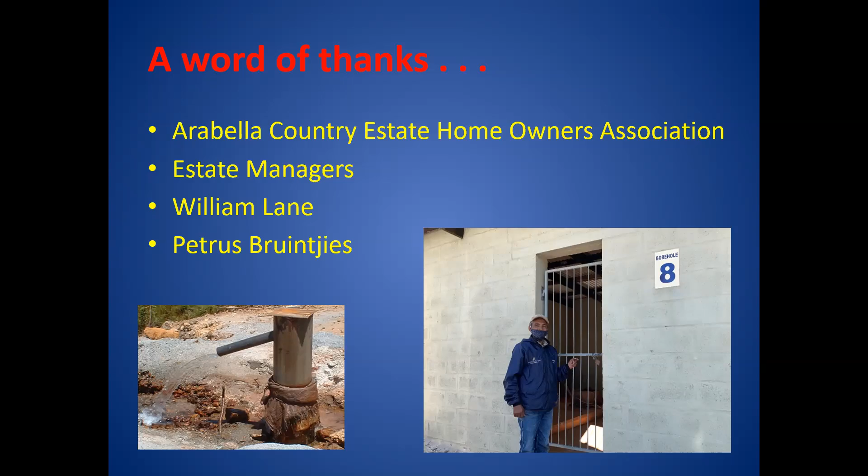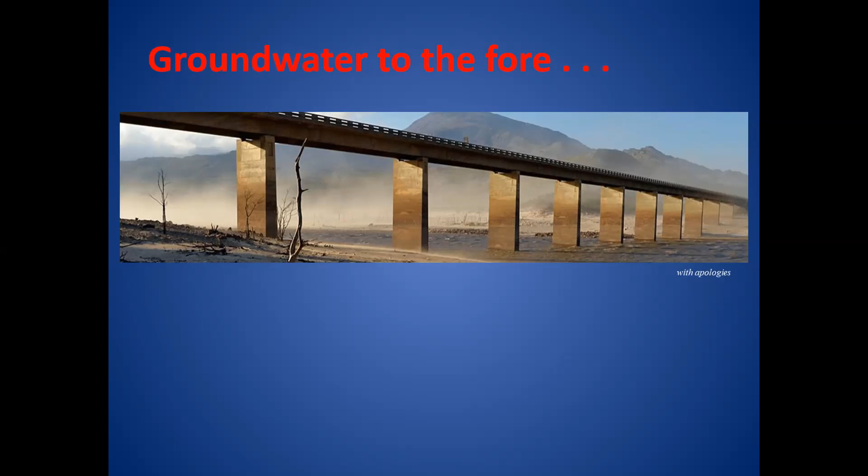This is a picture that many of you will be familiar with, but it's slowly starting to recede in our minds that not that long ago, Theewaterskloof Dam was operating at around 13%. Cape Town was about to go into a day zero scenario. So groundwater came to the fore, and it was on everyone's lips. We were starting to think about how the population of Cape Town was going to be supplied with water.

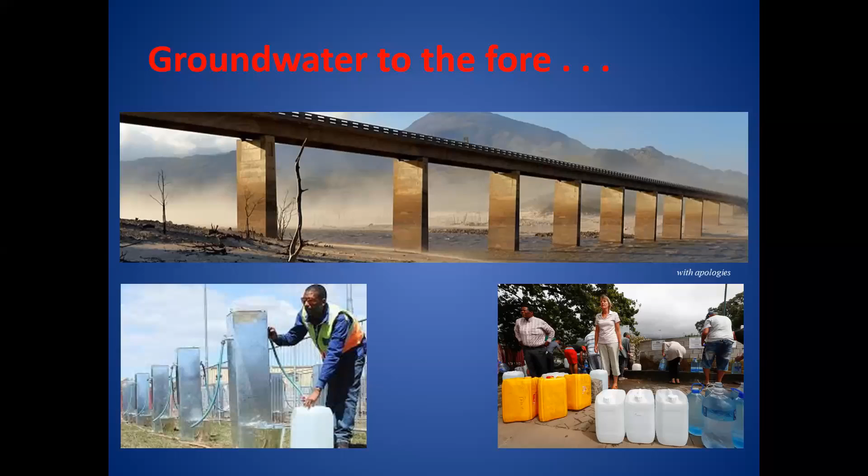And the city was talking about pods, and we had to go and fetch water in buckets and barrels and containers. And so groundwater is very much at the forefront. During that time, though, there was a lot of negative comment about groundwater, how it's an unsustainable resource and it's badly managed and so on. And I hope what I can do today is demonstrate to you that that's not true.

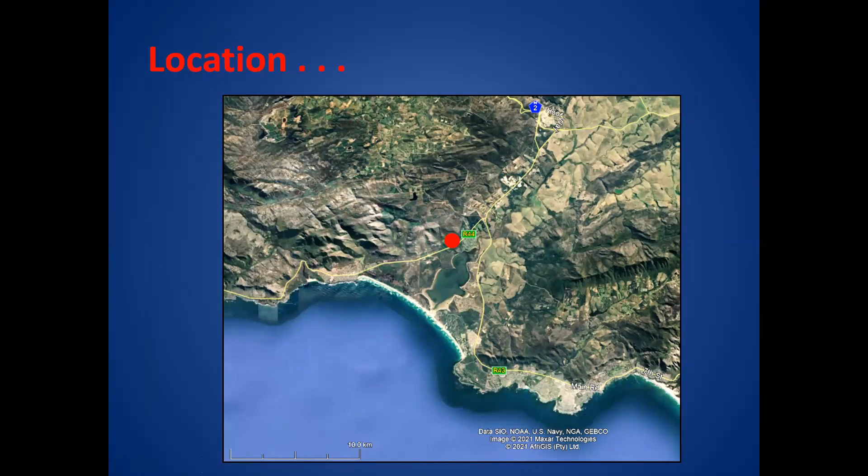So to give us a location, Arabella Country Estate is located at the end of the R44 to the east of Kleinmond, which is situated here, and to the west of Hermanus. It's located in this valley, the Bot River Valley, and this is the Bot River Lagoon that many of us drive past all the time.

It wasn't a smooth process. There were a couple of developers that were involved, and every so often the people we were dealing with would change, or the name of the development would change. I think it started out as Laughing Waters, then it moved on to Hermanus River Country Estate, I think, and it's been quite stable at Arabella Country Estate for the last while. And Arabella Country Estate contains three different components. One, it's the hotel. Two, it's the golf course, and three, it's the residents that have houses in the estate. But they operate and are supplied with water from the same source.

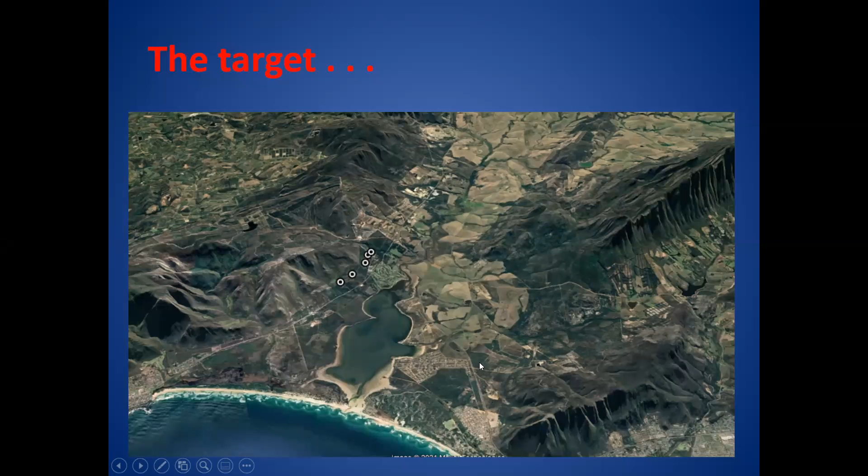So over that image, I draped the 1 to 250,000 geological map. And the key feature that we see is this major fault that runs here, and that is the western limb. And we see another major fault system that runs over here on the eastern side. So outside of the valley, we have Table Mountain Group, and on the inside of the valley, we have Bokkeveld. And the agricultural practice is all on the softer, more erodible and soil-rich Bokkeveld, where the water is stored in the harder, very competent quartzites of the Table Mountain Group.

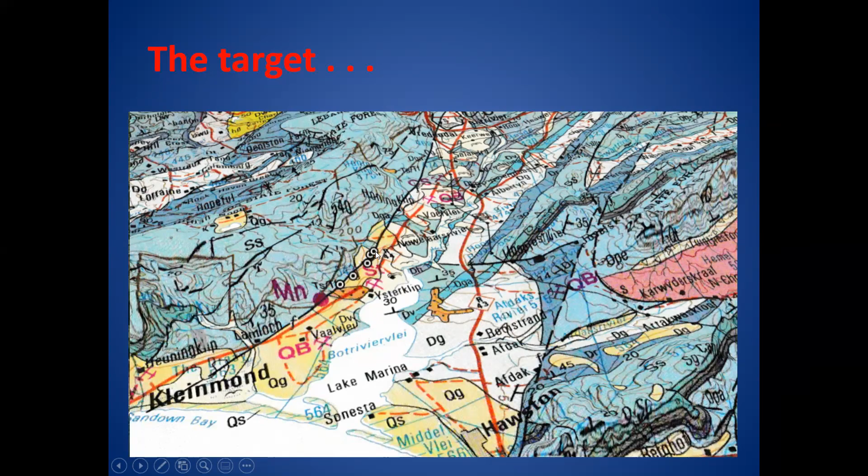So here the target that we have is this fault on the western limb of what is really a classic horst and graben structure, and we're dealing with the Nardouw. So the Nardouw generally doesn't have a good reputation, with the idea that it's iron rich, but in recent times more and more groundwater has been developed out of this formation, and we're learning to deal with the iron that it does contain.

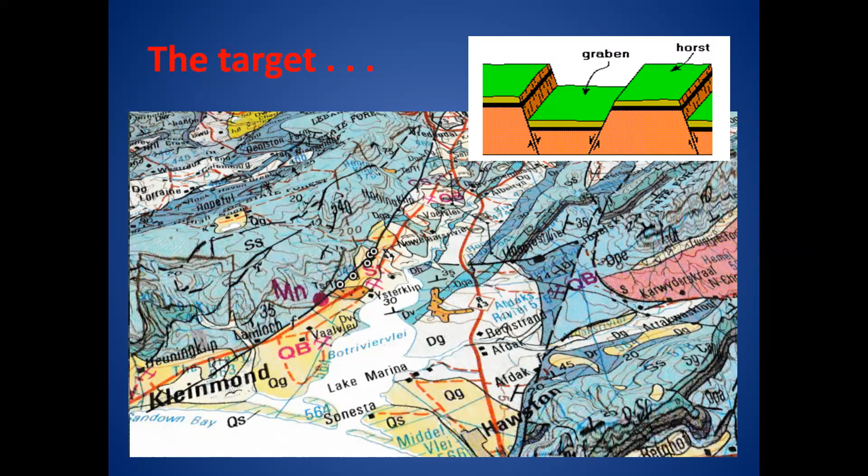Right, so just to remind us that we're not dealing with a primary aquifer system. The primary aquifer system is where water moves between the individual sand grains or cobbles or whatever, but there's no secondary processes that are required to enhance the hydrogeological properties. In this instance, we're dealing with a fractured rock aquifer, where the water moves in openings created by some sort of secondary process. In this case, faulting, but it could also be folding, it could be bedding planes, it could be weathering and so on. But here we're dealing specifically with a fault.

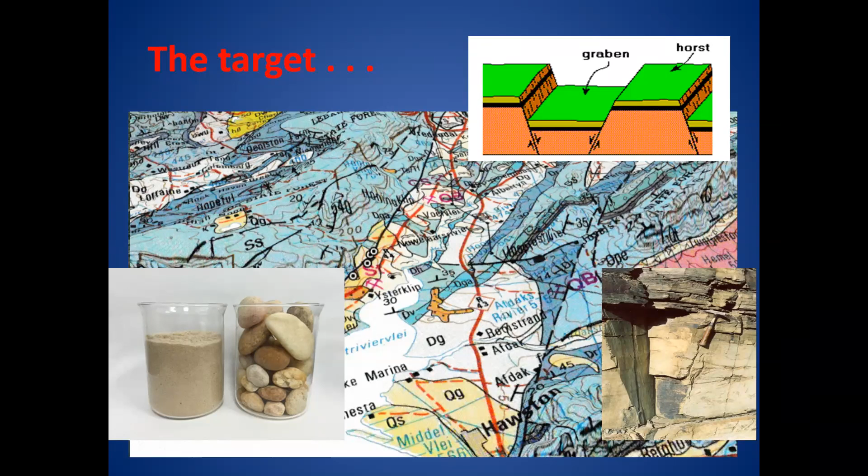So I heard earlier that we've got a geophysicist in the audience, and I often get nervous because I'm far from being a geophysicist, but geophysics is a tool that we use, like any geologist, to try and understand what's going on. And I'm quite proud of this picture because I dug it out of my original files.

This was from project number 3 of Parsons and Associates, where we were asked by GIBB Africa to go and do some resistivity soundings and some profiling so that we could pinpoint the fault and help site some of the initial exploration boreholes. And if you look very closely, you can see some little lines around the north arrow. You can see some little lines around the scale.

And this was way before we had the computing abilities we have today. This was a cutout of an orthophoto map where I stuck on labels, I stuck on the scale, the north arrow, and you Tipp-Exed around the edges so that they didn't show clearly when you photostated. And this is the original masterpiece that went into my report in 1998. You'll see that a couple of the labels are missing, but it just shows you the technology we were using.

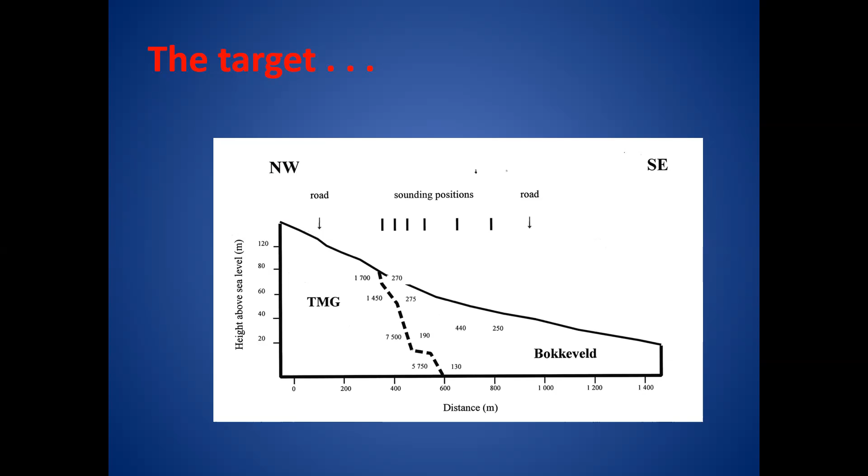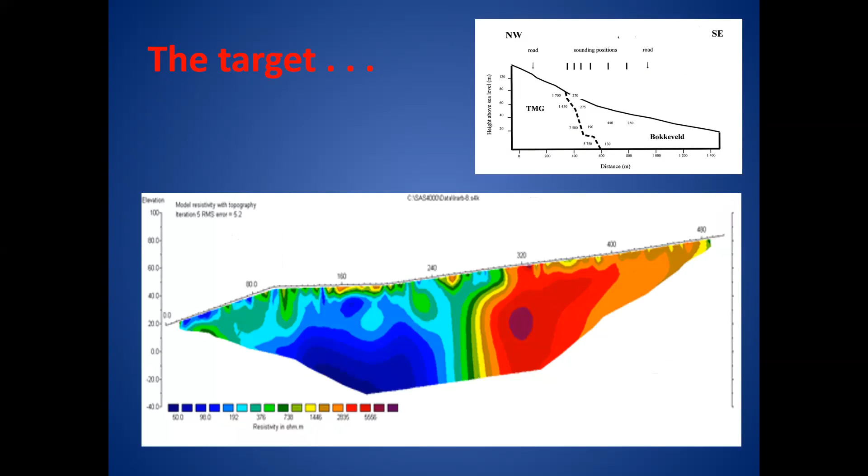But this feels a little bit like it was back in the day, because since then we've moved on to much fancier, much quicker, much better resistivity tools. So this is a traverse that is produced from a multi-electrode Lund system, and we've been using these quite routinely across Arabella to try and pinpoint the fault as our exploration grew, to get more and more water for the facility and to improve their water security.

And because of that contrast, we were quite easily able to map the fault. And we also started targeting some fracture zones that came off the fault system. And you'll see that almost all of the production boreholes target the fault. And then we went off the range on 2 occasions to drill this borehole and this borehole, which I'll explain in a moment.

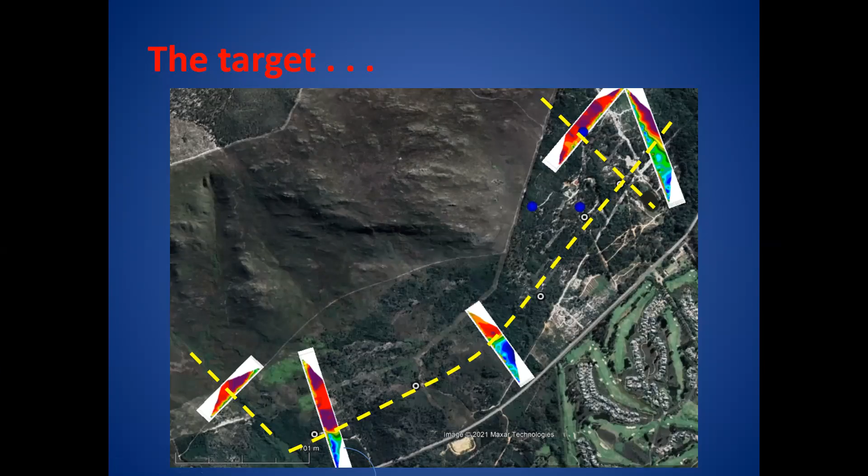All right, so the first exploration borehole was drilled in 1997. It was driven by Dr. John McStay of GIBB Africa, or whichever version it was at that stage. And he, using Fairbrother Drilling Company, put down 2 boreholes. They were quite shallow boreholes, and they were able to show that there's good groundwater resources to be had out of that fault system. The boreholes weren't very well constructed, and we did some pump tests on them that showed that there were quite a lot of losses because of this construction. But they were the start of the process of developing a water supply for Arabella.

In 1998, we sited the first 2 boreholes, borehole LLBH3 and LLBH4, and from now on I'll just talk about borehole 1, 2, 3. I'll drop the LL. LL stands for Laughing Waters, which is the name of the farm. We drilled these boreholes down to about 100 meters, and both of them were what I term very high yielding, 15 to 20 liters a second.

Because we were dealing with an estate that was quite remote and didn't have any backup water supplies, the first 2 production boreholes that we drilled were both fitted with PVC casing with 1 millimeter slots, as shown here in the picture, and then backfilled with quite a coarse gravel. And we did this to make sure that the boreholes didn't collapse on us at some point in the future.

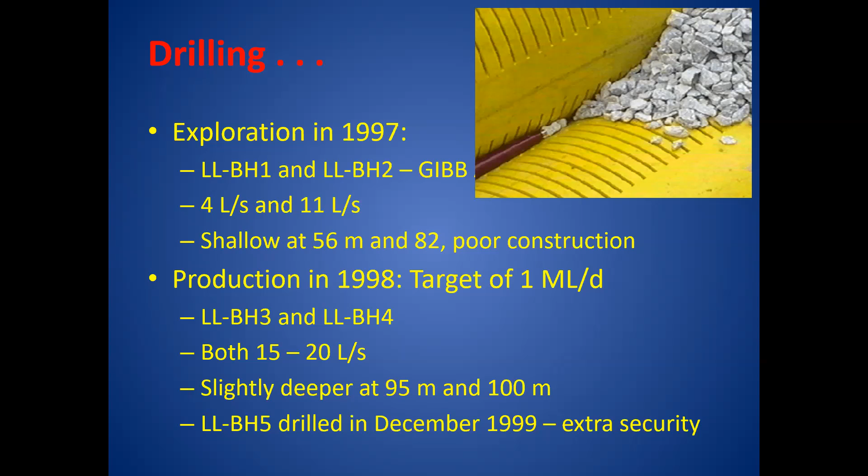And we wanted the borehole to be quite close, because one of the big expenses of any groundwater scheme is not really the drilling, but it's the pipeline and getting electricity to those points. So we drilled this fairly close. It wasn't a particularly outstanding borehole, but it was certainly good enough to make a contribution to the estate's water supply. We had 2 further drilling exercises.

In 2003, we drilled another 2 boreholes, drilling borehole 6 and 7. Again, they were quite nice yields at about 10 liters a second. These ones we pushed to a much greater depth, 220 to 250 meters. And I remember sitting in my office in Somerset West at that stage, and it was just when cell phones were becoming quite the norm.

And clearing my desk when we were down at 250 meters and we still hadn't got a water strike, and really starting to get worried, because our clients were quite demanding and they were quite precise. And when you've spent that amount of money and you haven't got them water, and you say, oh, we know what's going on, it was quite nerve-wracking. But fortunately, at 255 meters, we got a strike of about 10 liters a second, and the day was saved.

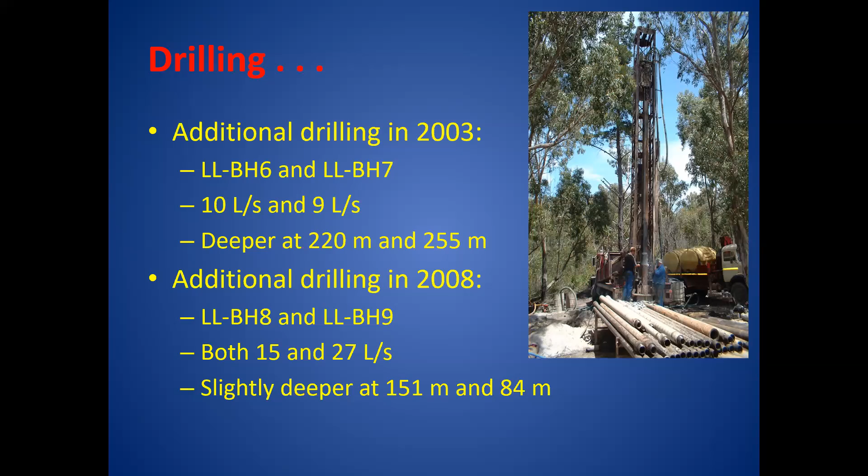And then again in 2008, we drilled another 2. So all of these boreholes that we were drilling was about ensuring that Arabella had the water security that our client wanted. So what we've landed up with now is a series of 5 production boreholes. Those are the ones that are marked in red. And we've got 4 other boreholes, 3 of which we monitor very closely.

Borehole 8 used to be in production, but we've taken that out of production because of iron biofouling issues. And borehole 5, we've also taken out of production because once we drilled borehole 6, 7, 8, and 9, it was felt that borehole 5 was very low yielding and we didn't need it. But it is available if we need to bring it back in production for whatever reason. So what you see there is the Arabella well field, and that is what keeps the 3 entities in water after it's been treated.

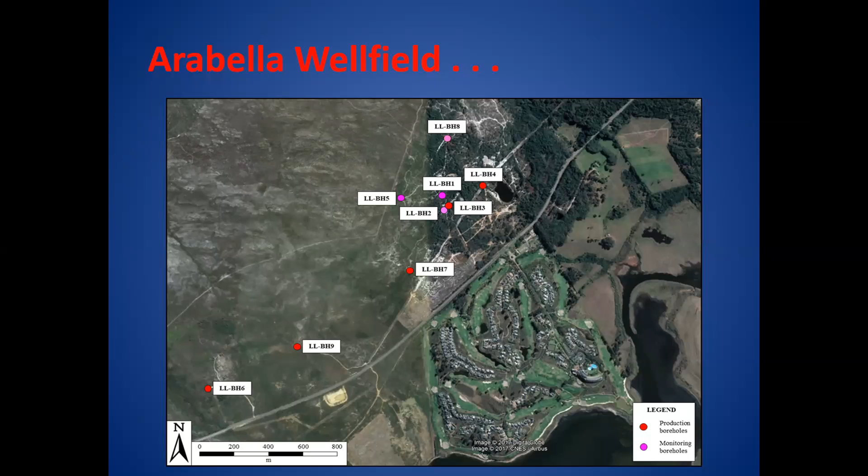One of the big challenges that we have at Arabella is the quality of the water. So the water is, you'll see just now, quite acidic, somewhere between 4 and 6. The salinity is very good. It's very, very nice water, but it has this high iron and manganese content. So some of the iron concentrations that we've measured in the past go up to 30 milligrams per liter. And if you remember that you can taste iron when it's above 0.3 milligrams per liter, that's 2 orders of magnitude more than when you can start tasting it. That's some of the highest iron concentrations I've come across.

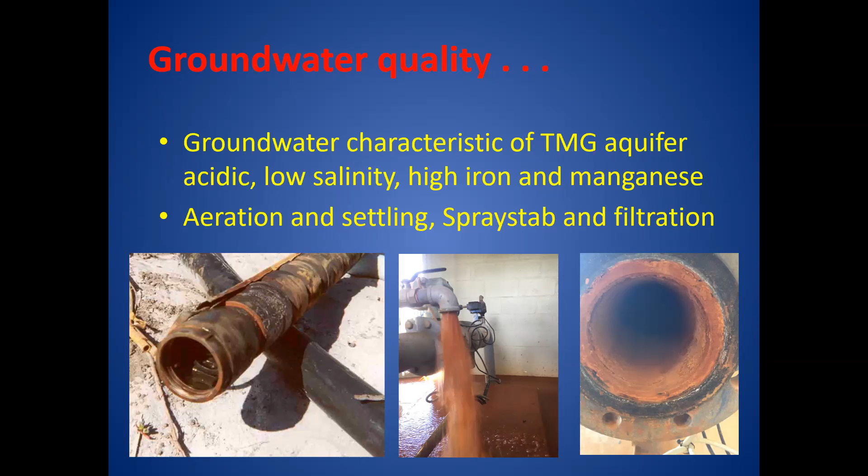So GIBB Africa had a specialist on their team, and they developed a treatment process where there's aeration and settling. It then went through a Spraystab system, and then is filtered. And they are able to get the iron concentration down to 0.1 milligrams per liter, so that it doesn't affect the taste of the water or any of the infrastructure.

It was quite amusing though that we had to jump through a few hoops, because while we were developing this in the early stages, when Arabella was just brought online, they issue these wonderful white tea robes and white slippers and things. And the first time they went to the laundry, they came back brown. So the poor engineer had to spring into action and make sure that his treatment process worked. But he was able to do that, and the system has worked well since that early hiccup.

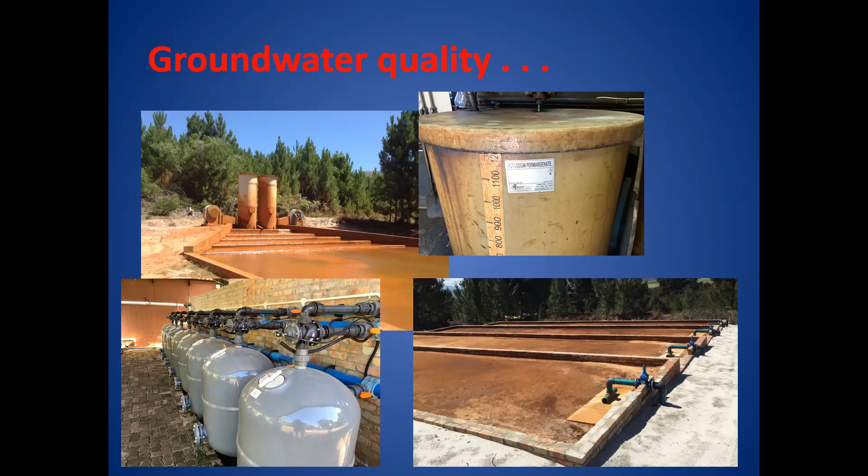What the iron does do, though, is that it creates big problems for the borehole and the borehole pump. So this is a slide of when we took the pump out of borehole 8, and you'll see all that residue and iron deposit around the borehole, and that gets into the impellers and it damages the pumps. The pumps don't last very long.

And just this morning, I had a talk with William Lane, and one of the boreholes has to be put through a borehole rehabilitation process, and the wet end of the pump, the impeller parts, need to be replaced, so as to bring this borehole back into production.

But I'm not fully on top of why we get this biofouling, because in actual fact, we've only found it in 3 of the boreholes. The other boreholes haven't shown the same sign. So why are we getting it in some boreholes and not the others? The wisdom is that we should pump the boreholes carefully and not induce oxygen to promote the oxidization of the iron. But that doesn't really work, because the boreholes are treated in the same way, they're managed in the same way. So there's room for learning to be done here to understand this better.

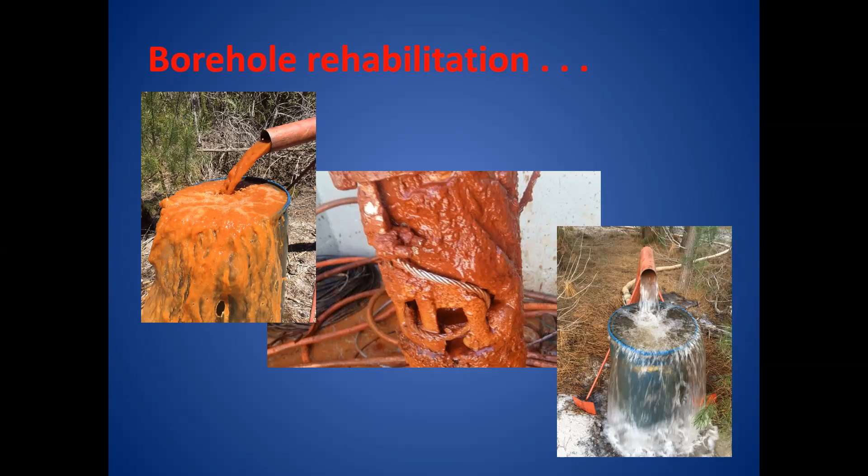All right, so in terms of the volumes that we pump at Arabella, initially we were allowed to pump 293,000 meters cubed per annum, which for many of you is just a number, but 293,000 is what Water Affairs said we could do. We initially started pumping just boreholes 3 and 4. We started at 15 liters a second, and we could quite quickly see with the monitoring that we were doing that was a little bit too much, and we reduced it down to 10 liters a second.

That pumping rate was driven by the rate at which the water treatment plant can operate. So one of the management criteria that we have is to make sure that whichever boreholes we're using at any one time have the ability to produce either 36 or 54 meters cubed per hour, and that's the rate of the treatment process.

In the early days, the owners of Arabella, so we'd gone from the developers now to the owners who were bringing it into implementation, the idea of worrying about groundwater monitoring and water supply was not high on their agenda. They were far more interested in the type of carpets and the quality of the food and the training. So we struggled to get a proper monitoring and management system into place.

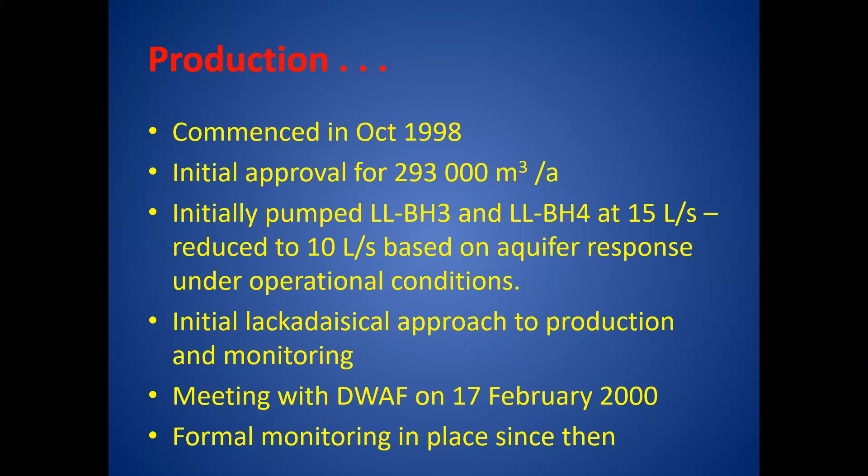Because of a concern about the volume of water and us getting it wrong in the beginning about how much we needed at what time, the application was made to increase the volume from 293,000 to 350,000. And we now have approval to supply 350,000 cubic meters per annum from the boreholes. One of the cleverest things I ever did is when we got the letter from the Department of Water Affairs confirming that, I've kept it in my safe ever since.

And every couple of years I get, Roger, do you know where that piece of paper is? Because having a license out of the Department of Water and Sanitation is like gold dust. The water supply was then also supplemented with dam water that was used for irrigation, and some of the effluent is recycled and also used for golf course irrigation.

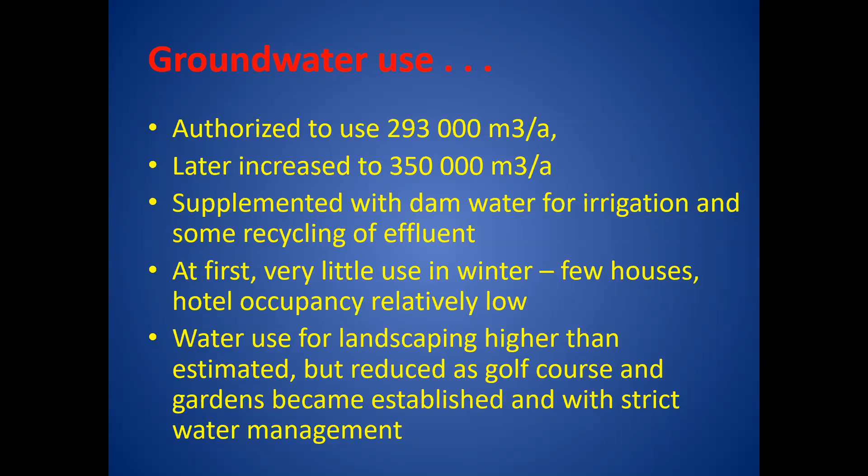In the beginning, there was very little use during winter because there were few houses and the occupancy of the hotel was low. But most of the water was used for irrigation. And then slowly, as the estate developed, we saw a change in pattern. So the total amount of water and the peak amount of water in summer remained about the same, but slowly we saw the winter demand increasing as more and more people settled in Arabella, and the hotel became more established and better known.

Drawing graphs like this is quite time consuming. I'm very lucky in that William takes his job very seriously. They measure the borehole flow meters on a daily basis. At the moment, we visit the site every 4 months. It started that we were visiting it on a monthly basis, but as we've got more and more data, and as we understood the aquifer more and understood the water patterns more, there's been less and less of a demand for us to go into site. We also have data loggers, which I'll talk to you about in a moment, that collect data in our absence.

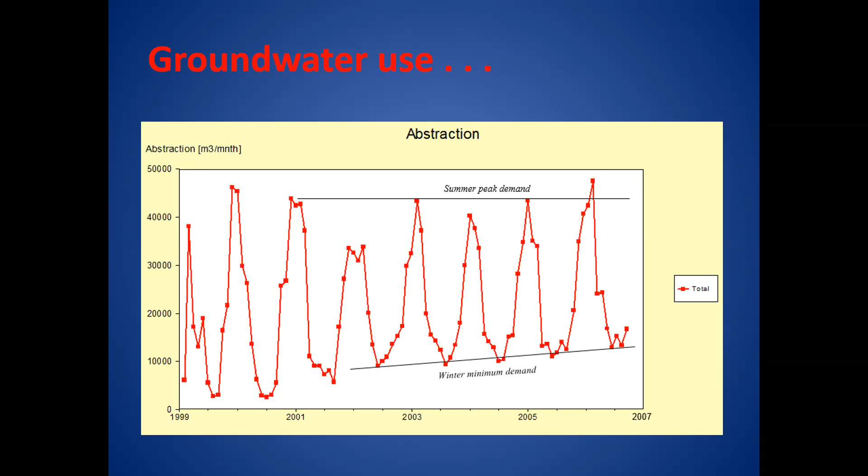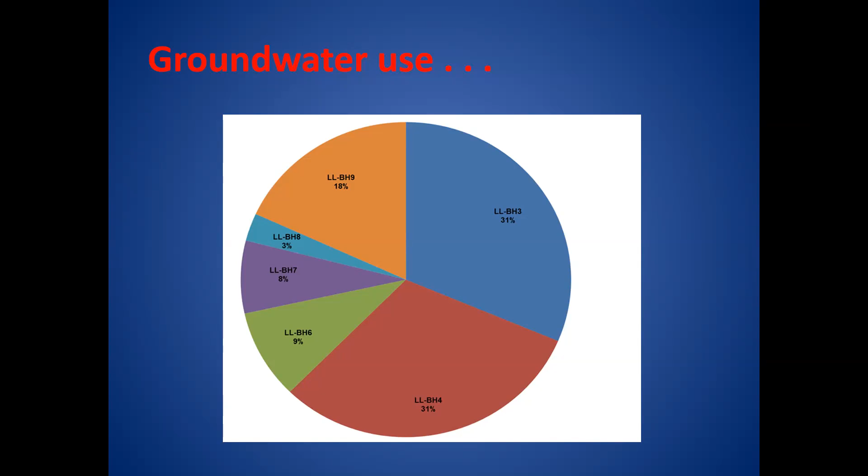Now we're really more interested in understanding the pattern of how those boreholes are used. So we have 2 major boreholes, 3 and 4. They remain the backbone, and they're the workhorses. These are the 2 boreholes that supply water in the summer months when the demand is high. They're sometimes backed up by the smaller boreholes. This is a slightly old slide where borehole 8 is still being used, but the lesser boreholes are borehole 6 and 7. And borehole 9 is predominantly used in winter, where we rest boreholes 3 and 4. And borehole 9 is then the mainstay in winter.

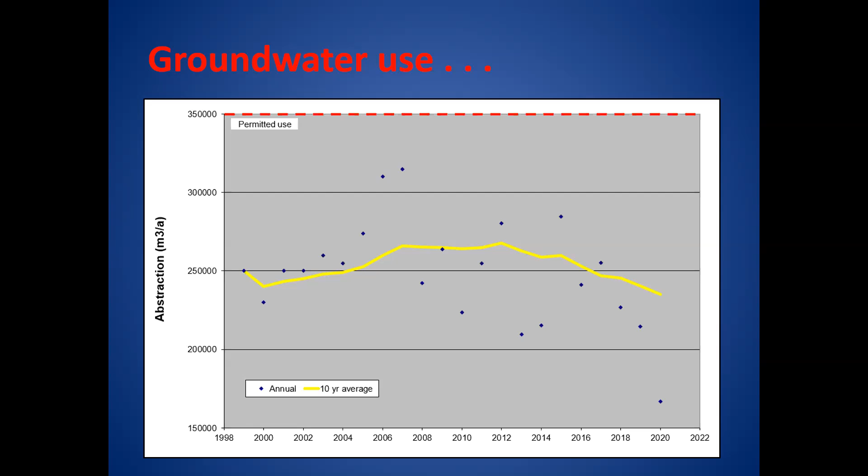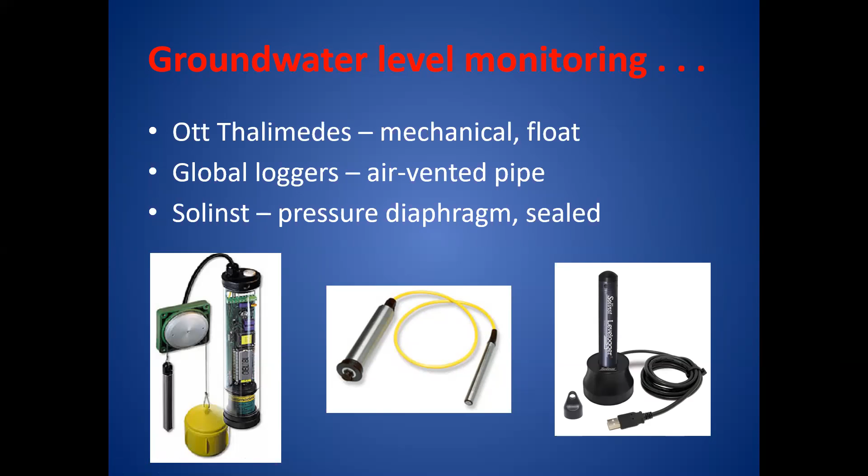So in these 20 odd years that we've been measuring and monitoring groundwater at Arabella, the tools that we've used have changed quite dramatically. So we originally started with a mechanical system which had a float, and then the turning of the wheel was logged. We then moved through to a global logger, which is the system here where the logger is connected to this device by means of a vented pipe. So there's a small hole and it would measure air pressure. And now we're on the 3rd generation where we lower this device down. It's about the size of a cigar, and it measures the pressure at the height that you hang it, and we pull it out and download it, and we can draw graphs, something like this.

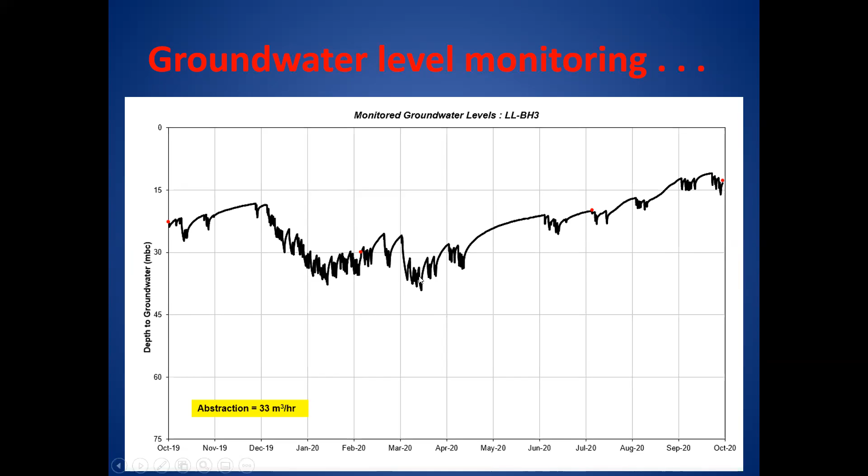But unfortunately, us theoretical hydrogeologists don't have our way, and we have to be driven by the water demand of the client. The client is very well aware of the need to manage the aquifer in a certain way, but the realities of life are such that we can't do this, and we have to work within the constraints that we have.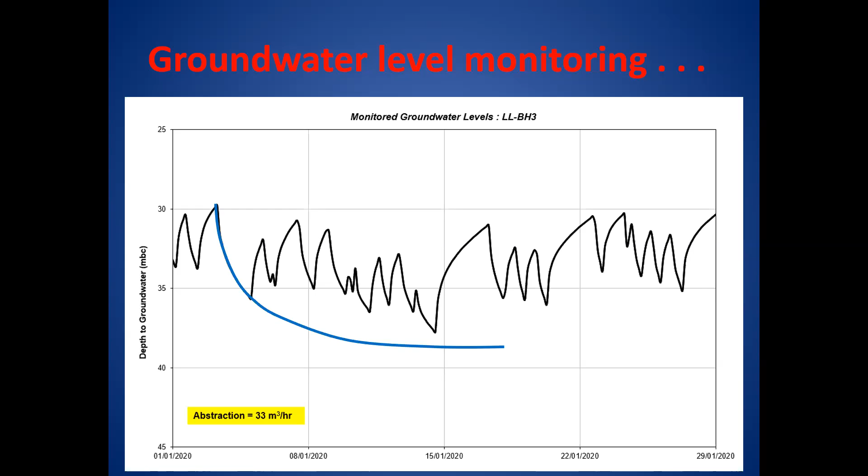So this is a layout of the management plan that we have for Arabella, where we run borehole 3 for a month in summer, and we run borehole 4, and boreholes 6 and 7 act as backups if it's needed. And we alternate that throughout the summer, and we can see on the groundwater level graph that's how it has been working. And then in winter, we turn off boreholes 3 and 4, and we then revert to borehole 9, as I explained just now.

What is very interesting for me is that I lay out these things and I think about the way we would like them to be and what the ideal would be. And often the borehole that is being used is driven by whether Petrus is on duty or not. Now, Petrus doesn't have a driving license, so he can't get to borehole 6 to manage it. So if he's on duty on a weekend or there isn't a driver available, borehole 6 can't be used, and they have to use one of the other boreholes.

It's for me just quite amusing that sometimes we think we know things and we want things done the way we want them done, but real life doesn't allow us to behave like that all the time. I must admit, though, that William works very hard to follow this plan, and by and large he gets it spot on.

Right. The second learning point that I've taken out of my time at Arabella is we always get asked, well, how much does the aquifer produce? How much can you get out of the aquifer? And it's actually quite a difficult ask to confirm what the sustainable yield of an aquifer is. So Arabella is an interesting one.

If you take the fault, the western limb of that horst and graben structure, it almost acts as a long pipeline that water from the surrounding rock can drain into, and then it can move quickly into the fault, and then is transmitted quite quickly. So working out exactly where the aquifer is and how big it is is quite a challenging task.

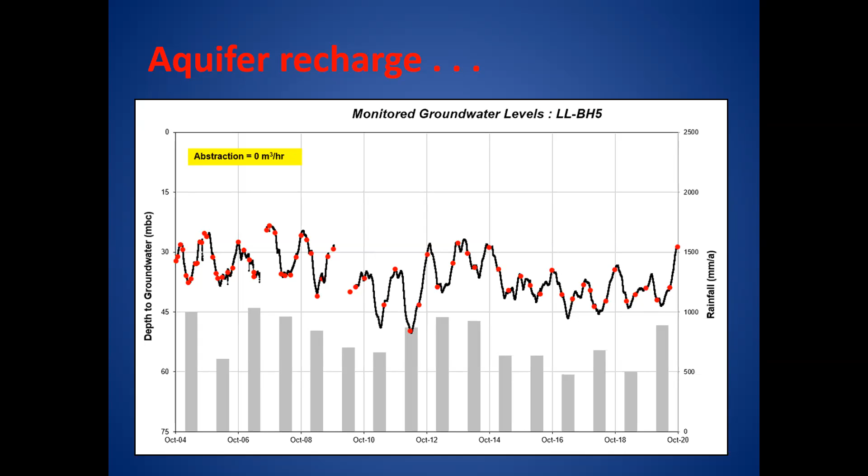And this relationship between the water level and the rainfall reminded me of some work that a former mentor of mine, Dr. Koch at the Department of Water Affairs, used to do. He drew these graphs on spring flow, relating rainfall to spring flow. And so I said, okay, well, let me try this graph on rainfall to the end of the winter recharge period water high level. So the highest water level we recorded.

And I got this surprisingly very, very good relationship that now starts to allow us to see where the water level should be based on rainfall. And if the groundwater started to be used unsustainably, we would expect the relationship to start drifting away from what we see here.

But as all good scientists, just when we think we understand things properly, something comes along and reminds us that we're not as clever as we think we are. And we've got 2006. It's nowhere close to what the expected relationship is. And the only way I can explain this is that 2006 was a once-off period of very low rainfall, and we still had a hangover from the previous good recharge periods. And the winter high that we observed in 2006 hadn't been affected by that single event of low rainfall.

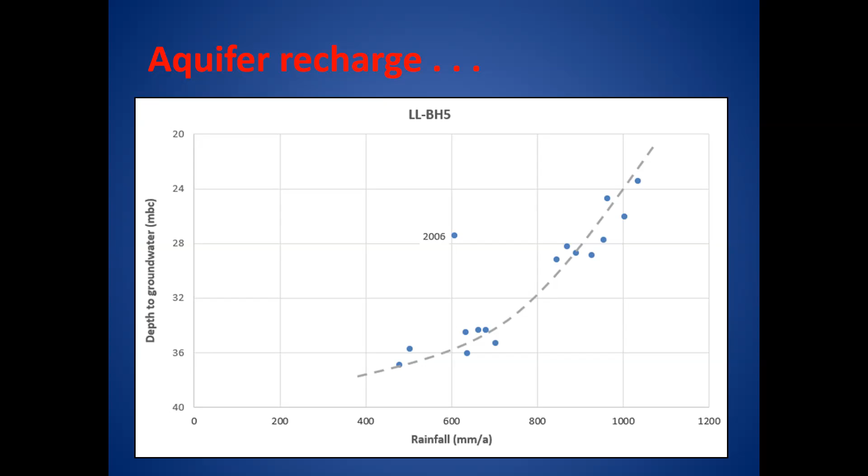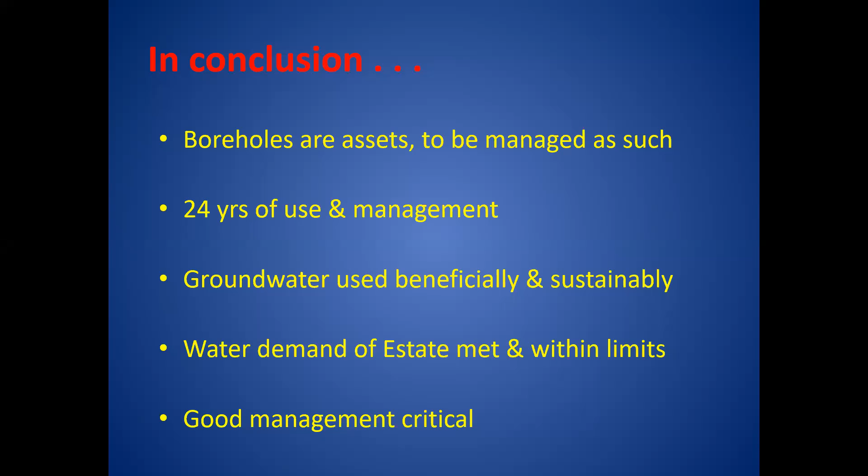And this all wouldn't have been able to happen if the groundwater supplies to Arabella Country Estate weren't managed in a very good manner. Right, I think that's all I have to say. Thank you very much.

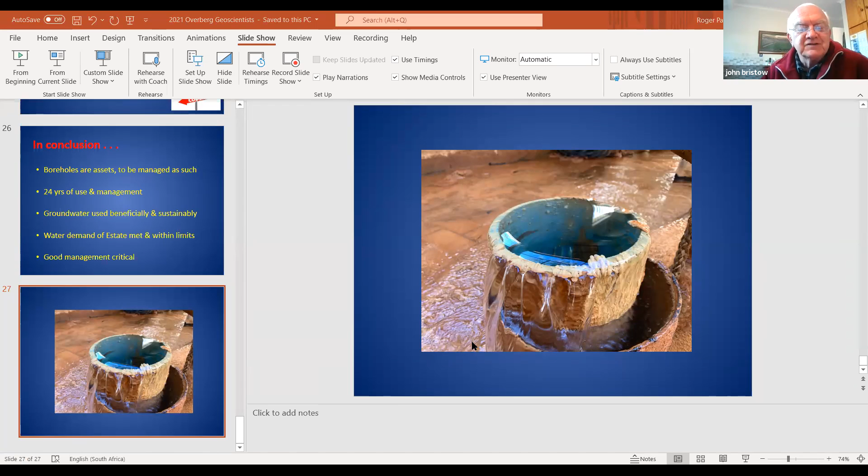Thanks, Roger. That was fantastic. Do you want to unload or share your screen, and then we can open up the questions and answers? Let me work out. I can do that. Fantastic. All right. Okay. That was really excellent.

And most of all, I love your very last point about management. And credit to yourselves and Arabella, and credit to our Hermanus municipality. And if only that sort of approach applied to every one of our municipalities, be it Kimberley, Lichtenburg, Standerton, and the list is endless. With a plan and management, those sad towns certainly shouldn't be like they are today. Anyway, that's my first takeaway, but let's have some questions from other people. Thank you.

Right, who's first? Can I ask something, John? Yeah, go for it.

That graph of yours, Roger, of the sustainability with the 2006 outlier, made me wonder if you have a bit of a hysteresis effect, and maybe one could actually look at 2-year periods instead of just 1 year, just to try and smooth it a bit and see if you don't get more information out of it.

Thanks, Peter. That's a great idea. I'll try that, because it's always nice to have a strong relationship that comes out, but it's never nice to have the one that doesn't play ball. So I'll give that a bash later today. Okay, next person.